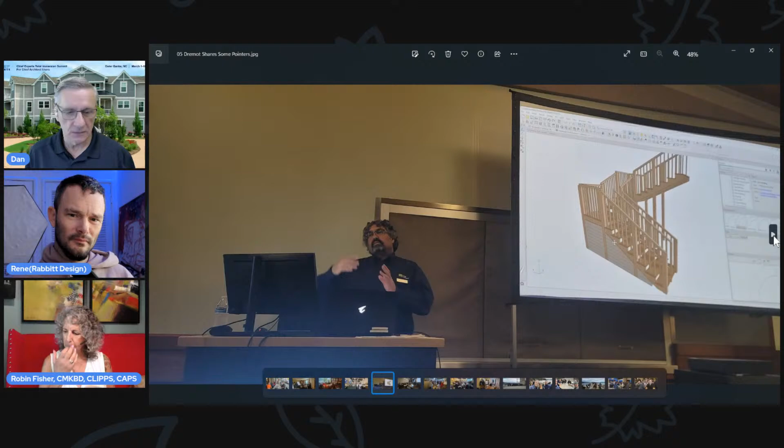Here we are in the day one training with Dermot. Dermot is the head developer there, chief architect, so when we want to have deep discussions with him about what's going on with Chief. That was really nice having Dermot lead that class. I just enjoy him and Brian too, they're both really good, but Dermot, because he knows everything that's going on there, he's the guy.

Here's our class, so it was a full room and a lot of great people there. So a lot of familiar faces that we see there every year, which is really cool.

Here we are after the first day, they always throw a little gathering at Le Peep. It's real close to the Kroc Center, and they put on a nice little spread that you can fill up on pretty easily. This year it was mostly indoors because it was cloudy and rainy outside.

And here we are at the table, everybody's having a good time, there's Ethan and everybody there. So nice little place, I understand it's a breakfast place. I didn't know that, it can't be, no, it's got to be full time, maybe I heard wrong.

Here we are back at the house doing what we do, chatting about Chief Architect.

On the morning of the second day, we always do a hike around Tubbs Hill, or Tubbs Trail. It's a little trail around the lake that's really nice, and I think we all pretty much made that one. It was really fun, lovely every year. And there's Lake Coeur d'Alene.

Jean-Luc, from Canada, our Canadian guy.

Here we are at lunch on the second day. The lunches were great, weren't they? Oh, they were so good. We'll put that on our replies to Chief, they need to do something a little different for their lunches. I wasn't sure if you were being sarcastic. Oh no, total sarcasm, they were not good. My mom always said you had to have one bad thing happen to have the greatest event ever. So that was it, they had two, so there you go.

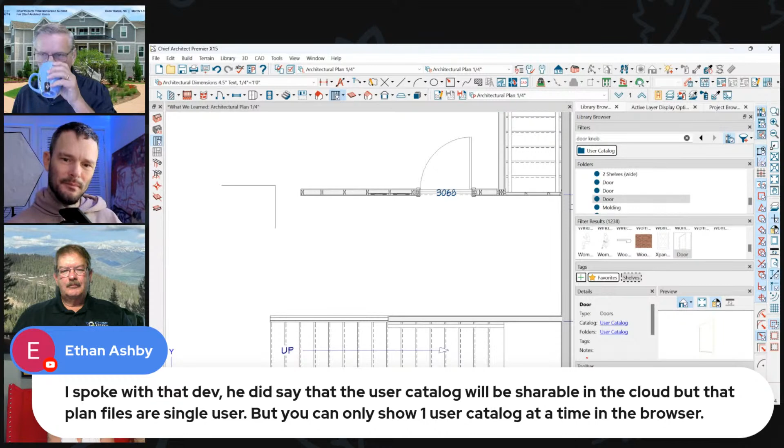Ethan says that the user catalog will be shareable in the cloud. Plan files are still single user, and you can only show one user catalog at a time in the browser. So he must have dug in a little bit more.

Pin one other person's comment up here. Let's see. Okay, someone said that they hope that next year they could be in the advanced 2 class. It was the one right up at the top - it was Voorhees design.

I'll say one thing about this: it's kind of no longer a class when you get into advanced 2. It's kind of like a powwow, more like a brainstorming session. I think it's a really good brainstorming session, and we learn a lot about what they're doing. They learn about what we want and how we're using the software. So from that point of view, it was really nice.

All right, so let me move on to my list. Get out of this screen here because I shouldn't be showing that. Where am I? What are we seeing now? You want to see my screen, don't you? You've got Chief behind that Chrome browser. Thank you, all right, here we go.

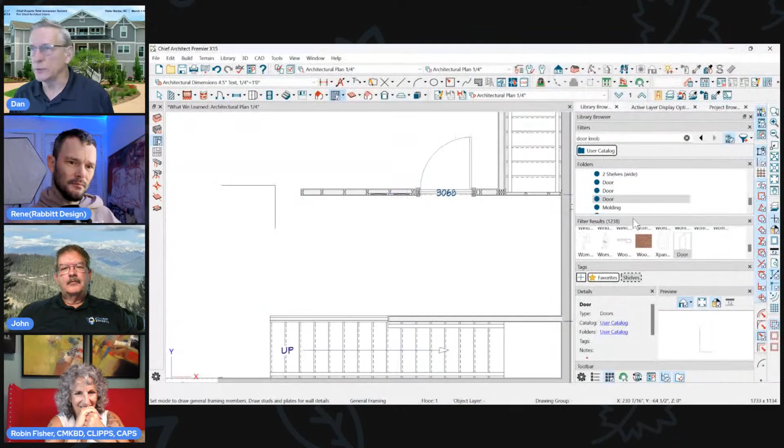And of course, my list. Here's my list. I do a good job of taking notes. Yeah, there were a couple things in here I have to ask you about yet. Let me just run down. I don't know how far I'll get on this list, but I'll go as fast as I can and get through some of these things.

One of the first things that hit me after talking to people there: people want to learn how to do better remodeling plans with Chief Architect. So you will be hearing from us about that, because I was a remodeling contractor for 20 years - that's all I did, and I love doing remodeling plans. They're my most favorite kind of plans to do. I'll do new home plans, but I don't enjoy them like I do remodeling plans. There's just something about remodeling I like, probably because it's my background. I like figuring shit out.

So you'll be hearing more about that. Creating a better designer show. Okay, so that's what we're working on. It just hit me as I'm sitting there - this is a good show. We have a lot of fun with it. We share a lot of great information. We'll do some nice things. And we got to do some better commercials.

And speaking of commercials, let me stop and talk about the new classes coming up, because we do have some new classes coming up. I wanted to see you suddenly holding a toothpaste container and promoting Colgate, or the latest book. Nothing like that. But sometimes it's the last thing I think about - what do we got to mention today?

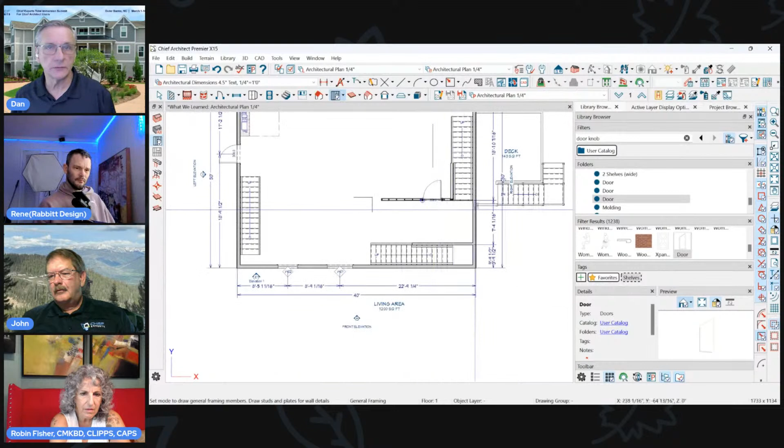Coordinate system in Chief - doing coordinates better. This is not a big deal, but a lot of the things on my list are not a big deal, but cumulative - they kind of add up to lots of cool little things. So you've got your little coordinate dealy bop down here now. I think that's a technical term. That's a good technical term.

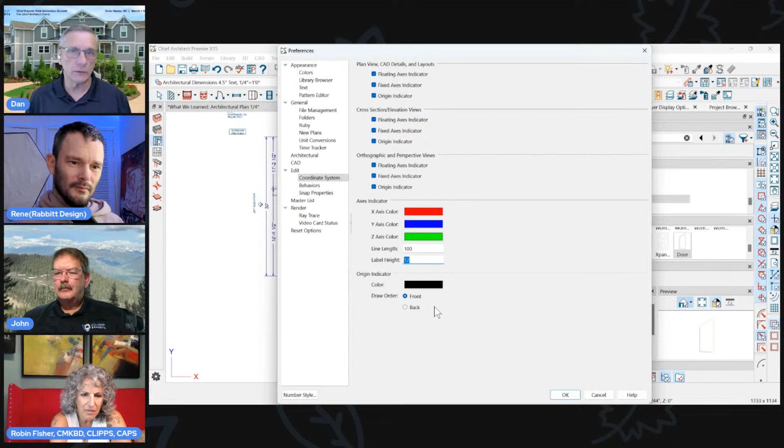Like XY - under preferences, there's some settings. Let me just turn them all on so you can see what it looks like. They have a coordinate system tab here now, and if you turn all these things on, I'll just do it. I would not use them all on, and I'm going to expand this to 100 inches, and we'll leave the labels at 12. So I just did coordinate system, and when you look at this now, I just made this taller - the lines here taller, but now I turned it on so you could see where X and Y is all the time.

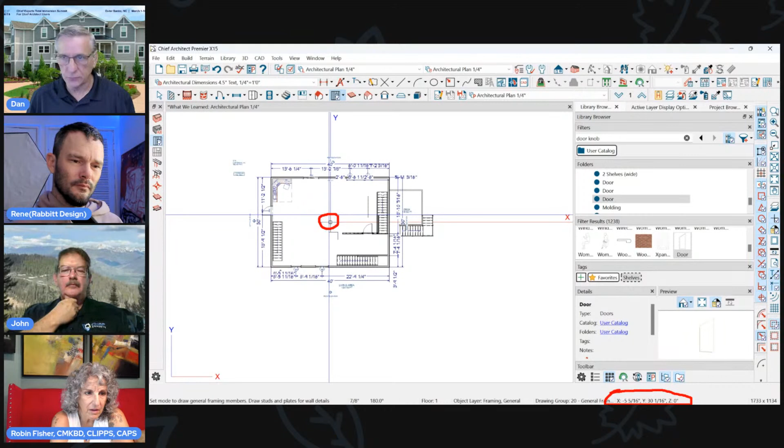Here's one of the other things - that's 0, the 0 coordinate in Chief Architect's coordinate system. When you start a model, you want to start close to that because that keeps the numbers that Chief has to multiply all the time smaller, which makes your plan a little faster. But what's kind of cool is - I asked this in the class - out of the box, that 0 is in the bottom left of the drawing sheet, which I thought's kind of funny.

That's not right - out of the box templates, the 0... right, theirs, not mine. I set mine 0 - yeah, I set mine the same as you, so 0 is in the middle of my model. Here's the 0 in this one.

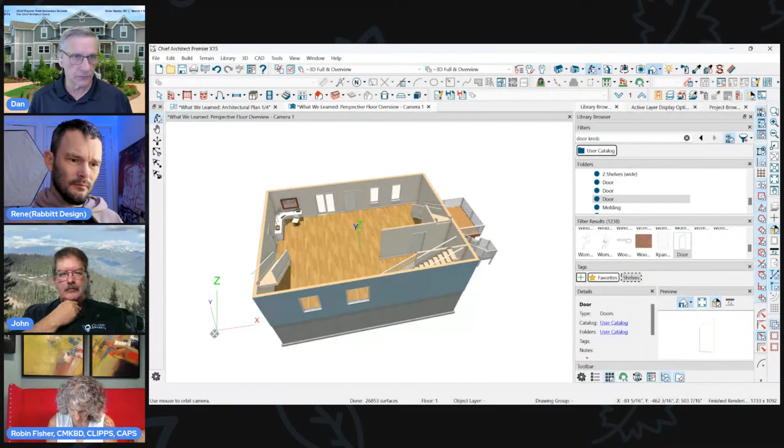But you could set this up so that - I made this a little bigger so you could see it a little better in the 3D views, so you can see which way X and Y is. You can also have it turned on so when you're looking at a view like this, you could know which X and Y is. I like this because Chief's a CAD software - we need to learn X, Y, Z to really function faster in this CAD software.

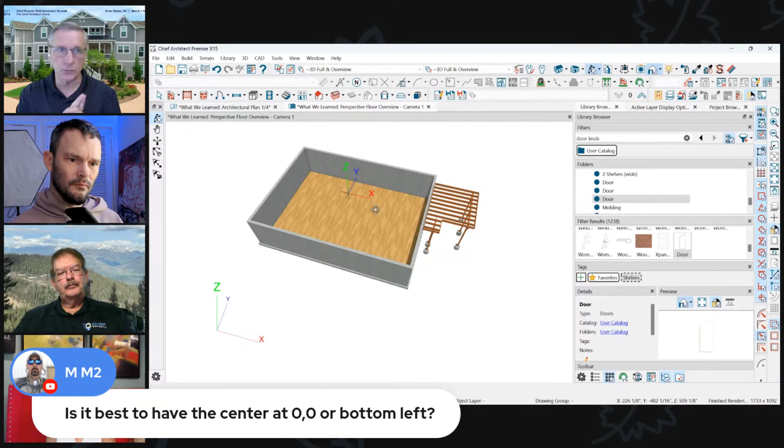This is cool. So run with this for a while and you get used to the X, Y, Z stuff. Then you can turn it off. You can also have that in your elevations, which is pretty cool.

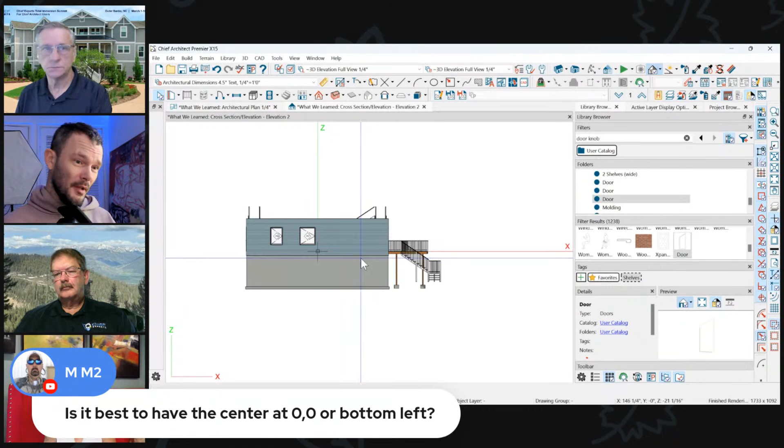So Mike asks, is it better to have the center at 0,0 or bottom left? I prefer it at center. I do too, works with the way I think better. And also, I happen to know that some features work when you're drawing at 0,0 that don't otherwise.

I think it's just a really good rule of thumb to keep your plan centered at 0,0, rather than have the bottom left corner at 0,0. Is it going to make or break anything? Probably not, but it's just a good rule of thumb.

Do you even need to know that it's there? Not really, to draw with Chief. That's one of the cool things about Chief.

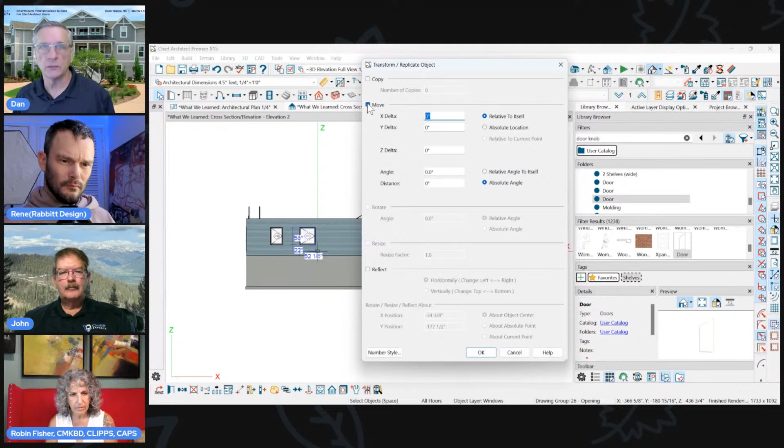But here again, I turned on these coordinates so I can see which way is X. So if I wanted to move that window to the right now in X, just by opening its dialog and say move that window 2 feet to the right, I could do that a lot easier because I know exactly which way X is. And I know that minus X would be this way, so if I wanted to move it back that way, I'd type in minus 2 feet. That's kind of handy when you're just getting used to this kind of stuff. So that's a little thing about the coordinate system.

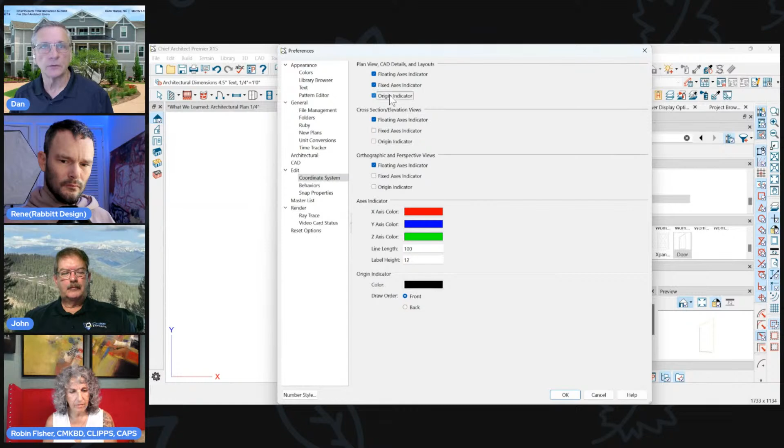I'll just set it back to the way it comes out of the box and go from there. I just wanted to show that. I thought that was interesting, there's a lot of things in preferences. As I'm going through this list, I'm looking at all these things in preferences. Man, they've added a lot of stuff in preferences. Kind of interesting. All right, back to my list.

Dimensioning windows to the inside of frame. To me, this was a big deal because I do a lot of as-builts, and it would be much easier to dimension my as-builts to the inside of frame instead of guessing where the outside of frame is. So what it means is inside of frame. See how I can dimension it here?

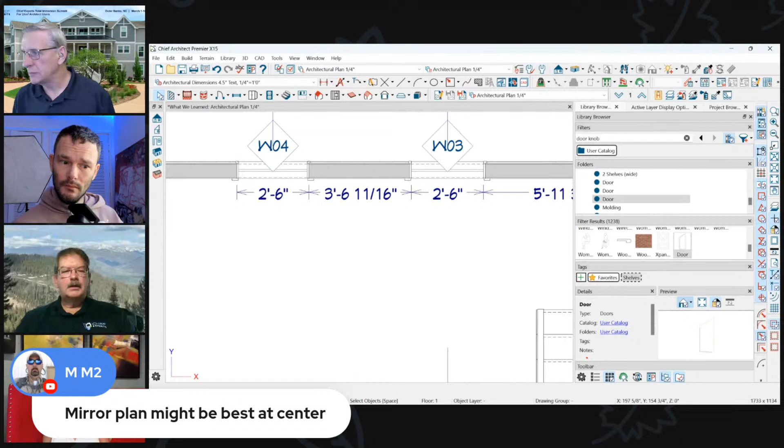Before you go on, let's talk about this a little bit. Here, John, you're breaking up really bad. Is that John? Yes. Yeah, you must have a weak connection, John, sorry, he's breaking up.

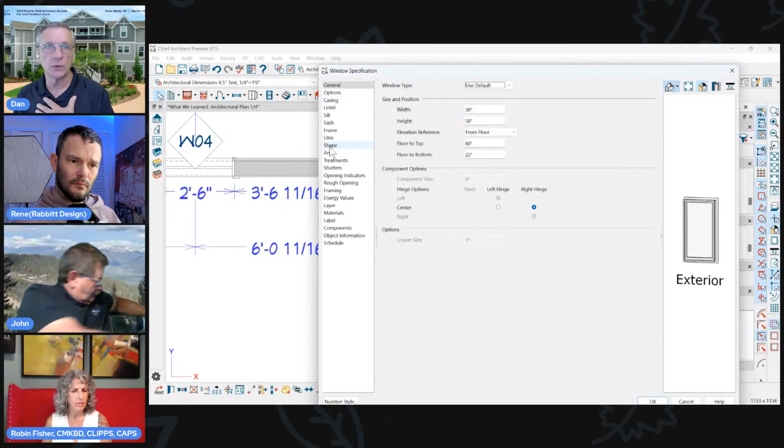And you have to set that in defaults, in your window defaults. It's not in preferences, right? Well, you could do both, okay, you could set up individual windows like I've done here. You do it both in the same place. So if you want to just do some individual windows, go to the frame of the window and set it here, right here. Okay, turn this on.

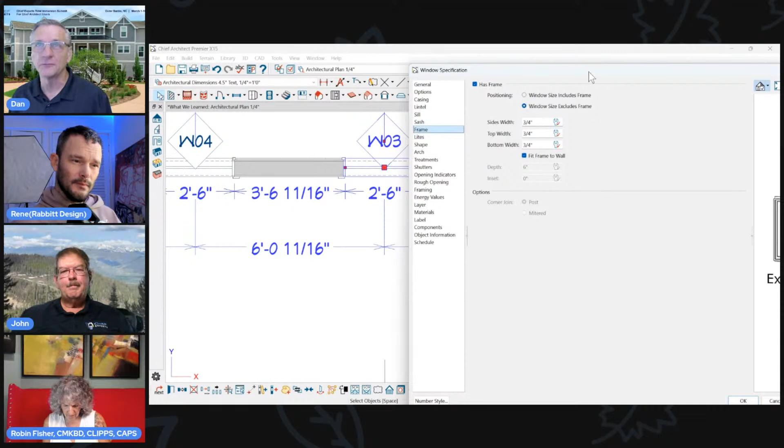Excludes frame. So they couldn't have said window dimensions to the inside of frame or something like that. To me it's like, I want a frame on my window, I don't want to include it. But no, that means dimensioning it to the inside of the frame, not the outside of the frame. That's really good, and it's very helpful for as-builts.

So that's a per window thing. If you want to set it up for all of the windows to do that, double click on the window icon, go to frame, and set it here. Now all of your windows will dimension to the inside of the frame. Okay, now do that while you're measuring the house, turn it off when you're done.

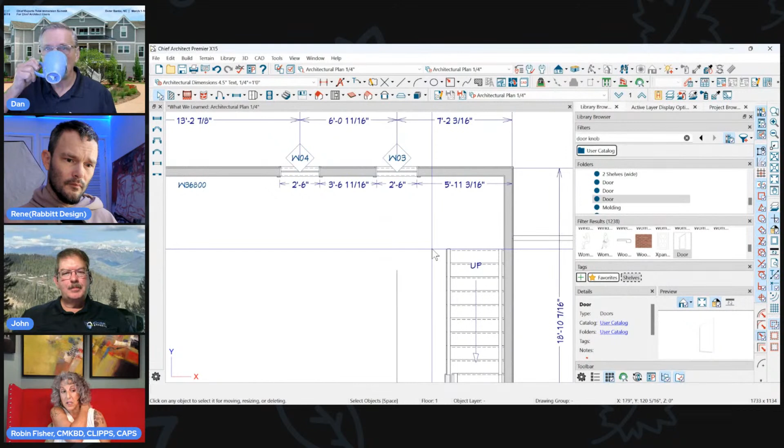See, it makes sense, I don't know, I don't understand why they put it there. It makes more sense that it just was in dimensions, because you have side, center, casings. Why didn't they just have inside a frame in dimensions? That would be kind of nice under openings, then you could turn it on and off when you want it.

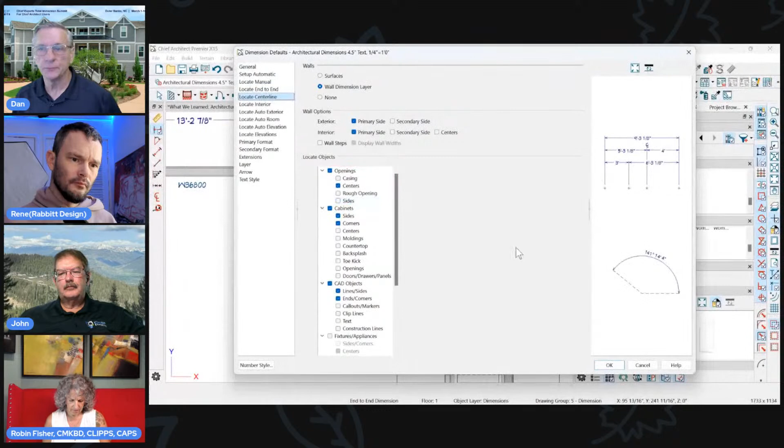Yeah, instead of being global or specific, right? So I'm not sure if we brought that up or not, but it would be nice to have that option just under openings. That's where it should be. Yeah, inside frame, right. So, but at least we can do it now. Yeah, no, it's great, we couldn't do it before.

And let me just, for those of you that might be new to Chief's dimensioning, let me just show something to you real quick.

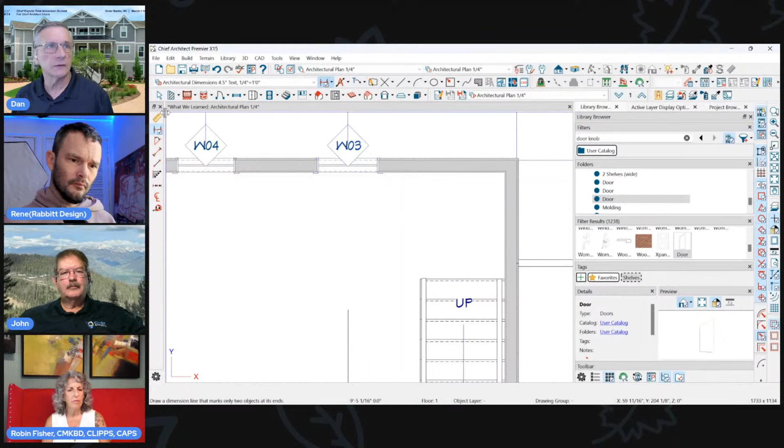So let's say I want to dimension that window. You start by putting your first dimension in - it's going to go to inside of frame, and you're measuring that window. So you move this to where you want it to be, 6 feet. Now I need to get the width in.

You don't have to open the window to type the width in. Just click on the window, click on the point here - see how that highlights now? Because I highlight the window and then click on the edge I want to move. Now I click on this number and say I want that to be 48 inches. See how I can move that over without even opening the dialog for the window. It makes it really easy to do.

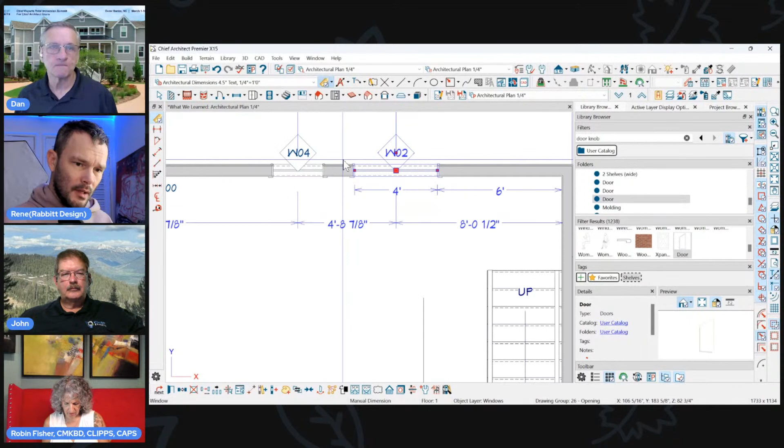It's nice to point out that you can see which edge is selected because Dan has his colors set in preferences. Under colors, I make my handle fills red and my selected edges blue, so it's a nice way to see things. I don't like how Chief sets it up with light gray by default - even the fill style is light gray, so it's really hard to see what you're selecting. I'm not a big fan of that.

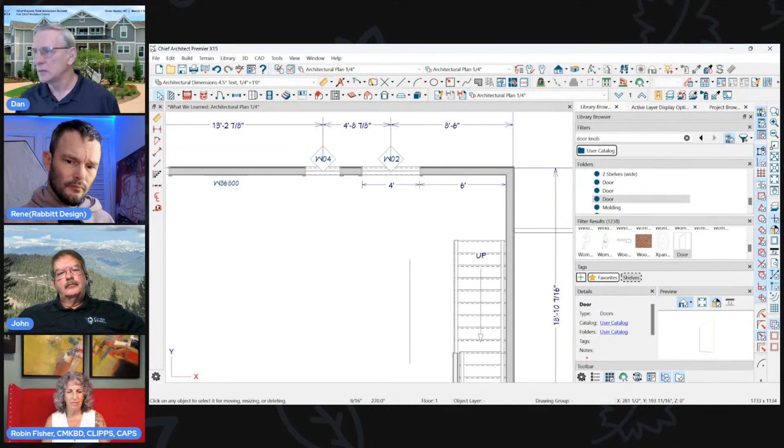How are we doing? Oh, we've still got a half hour here. Cool, design and client information.

Aaron's asking: dims to frames could be changed just for certain views via annotations, right? I don't believe that's correct - that's held in the settings of the window itself, which has directly to do with the windows, not annotations.

Hey John, how you doing? Where are you? I'm doing good, can you hear me better now? Yes. I just put on my headset - I was having so much fun teaching I forgot we had to be in the show today. Well that's a good excuse, we'll let that one go. Kevin has a client coming in that wants to do a 1.5 million dollar house, so he had to meet with them - we'll let that one go too, we get it, take care of your business.

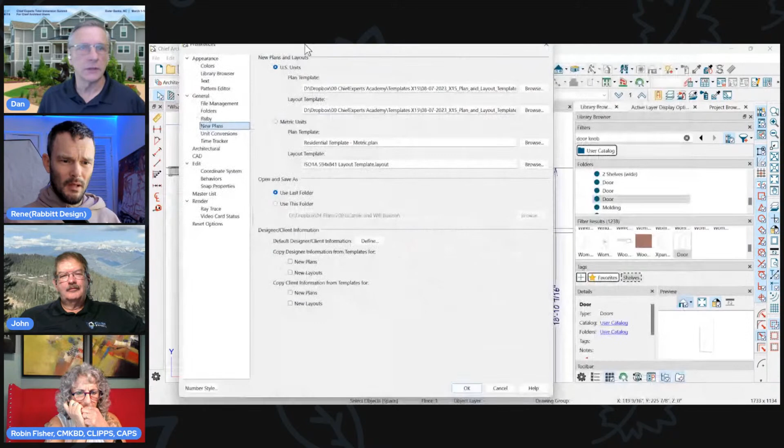All right, designer and client info - I was playing with this one a little bit in Chief. You'll notice in the preferences, under... where did that go again... it was under new plans. Here it is - this is new in X15, this designer client info, and you can define it.

So if you define it here under preferences, every time you open a new plan, whatever you put here is going to be in that new plan. So if I go to define and fill in my designer and contractor information, that's fine because you want that in every one of your plans, unless you do it differently. But for client information, I was just typing that in there.

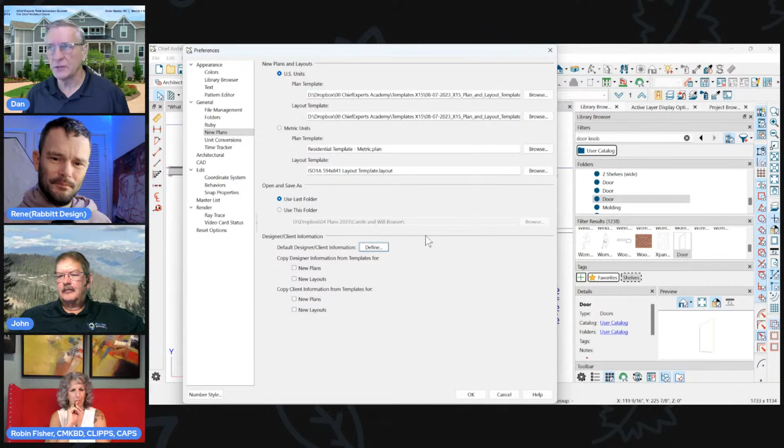You don't necessarily want that in your preferences. So it's like, well why did they put that there? I'm not sure, that was a strange one to me - it's kind of silly to put it there, unless you draw for the same person every time. But what you could do is put it in your template, go to save, and define it there - copy designer information, copy - exactly.

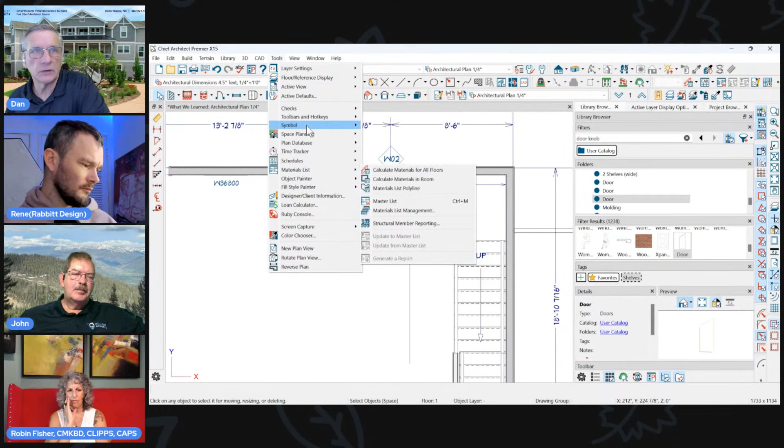So you could play with this and see how that works for you. What I've done in my template is I've gone to tools, designer client information, and put my information there. This will auto-populate on my layout pages, and then when I'm on my layout pages, I'll do the client information and that'll auto-populate my client info on my pages. And if I were to change page sizes, it would auto-populate that stuff automatically too.

Do you have to use this? No, but it can be handy.

It's so nice. We did spend some time talking with them about giving us some more custom fields that we could put in here and let us rearrange them, so we'll see what they come up with.

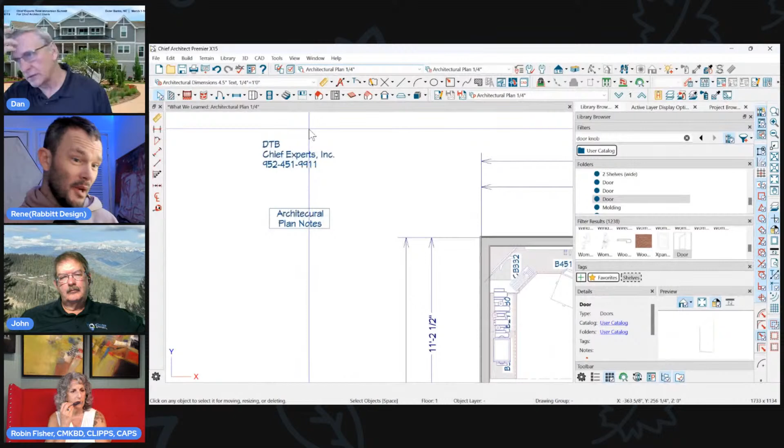Did they push back on that? What did they say? Because that is something we need to do. They said it might be easy, and then they said we don't like it when we say it might be easy. Well, I can understand that.

So when you use those fields, you're using macros. Here I've typed some text and I've used three macros: my designer name, company name, phone number. So you could have a block anywhere in your plan or on your layout that would automatically populate using that tool's client or designer client information.

The way you add a macro is you just click the macro button in the text box, contact info. There's the client, designer stuff, and here's everything on that list. So if I wanted to have my street address show up there, I click OK.

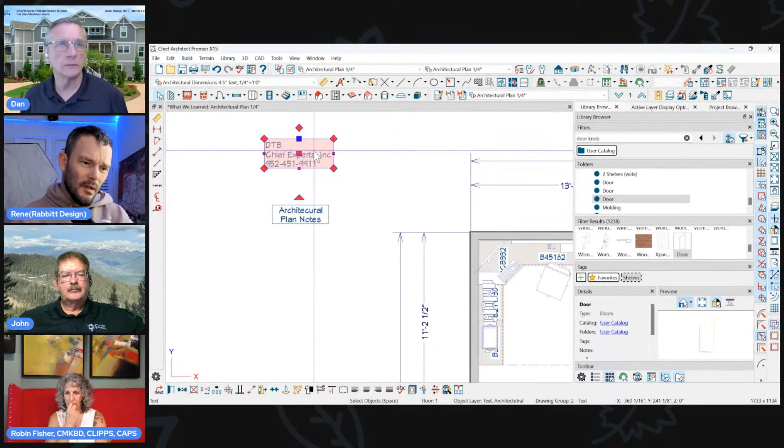I want to address this comment from Mike. He says, I have my logo on the layout, so I don't use this feature, which is the designer information. This is a way to store macro values and call them up very easily. So if you've never written a macro before, this is a really rudimentary and simple way to get a text macro that you could use everywhere.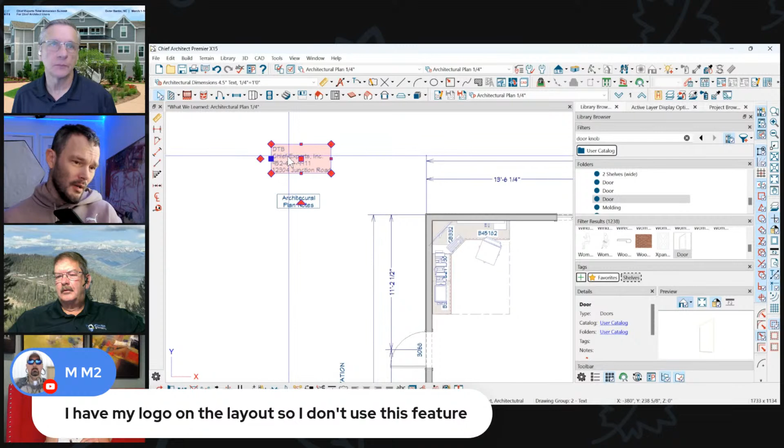It doesn't matter that it says it's the designer name. You could use designer name on your plans for APN or any number of information that you always want to store for every plan and draw up. So just something to keep in mind, that's a really simple implementation.

Renee's heavy into macros, so he's got some pretty complicated macros that he's developed to do different things for his project. But in this sense, it's very simple, so even guys like me can figure this one out.

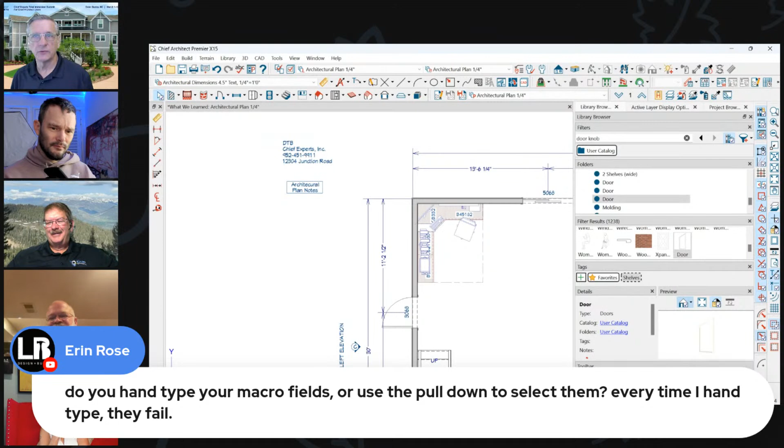Hey, Kevin. Oh, look, Kevin showed up. Hey, Kevin. How is everybody? What did I miss? Everything. Everything. There's a test, Kevin. There's a test at the end.

Kevin, you want to answer this question here? Yes. Which one are we on? No, you don't. No, you don't.

Do you hand type the macro fields or use the pull down to select them? Every time I hand type, they fail. You just have to make sure that you're typing in the syntax correctly, or they will not fire. So when we're calling a macro, our values need to be between percentage signs, and that macro needs to be in proper sentence case and everything.

For the ones Dan was talking about, for filling in the fields and stuff, you just select them from the pull down, those are already in the system. It's amazing how many are already in the system. There's a mean bunch.

And then you call people like Renee to get special ones. Yeah, if you're really stuck on that stuff, definitely call Renee. He can help you out on that.

The one nice thing about populating the preferences with your company information, it shows up on the plan and the layout when you open a new layout, unless you had it programmed in to start with, which is what I do.

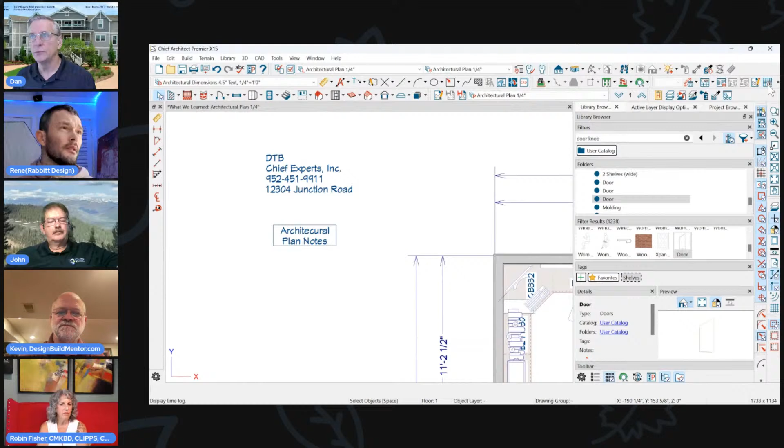The other thing about names, real quickly, let me mention this under Time Tracker. So when you're in preferences, go to Time Tracker, make sure you put your name there, so that if you have different people working on plans, when you do a sheet that tracks your time on the project, you can sort it by the user and see how much time each person has spent on the plan.

It's a smart idea. And you can select more than one line there now, and it will give you a subtotal. That's really nice. So I can go like this and hold my control key down and select individual lines, or hold the shift key down and select the whole group.

So it tells you how much time you got selected there, and then you can add notes to that selection and click OK. See, it added a note to all of those. Never done that before. Cool, all right, back to the list.

Facebook user, any chance we can do this real quickly? If you could expand on that, I'd love to know what. Which one we're talking about? Can you explain how the macros in a dropdown are much less than if you link an object properties macro query?

I think, Renee, you could do a whole class on that. Yeah, easily. I think we should just do a show just on macros, because there's so much to cover.

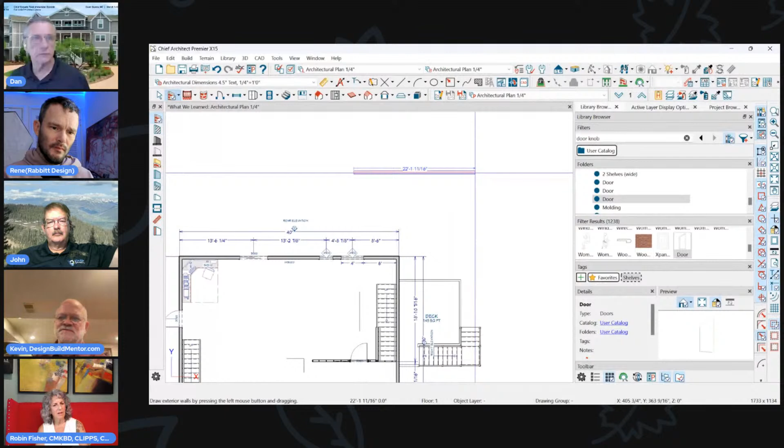My screen doesn't freeze, so let me zoom in and do it. When you draw a wall, notice that arrow. On the left side, it's got no arrow. On the right side, it's got an arrow. That's telling me the start and end of this wall.

So if you go to your preferences, edit, and turn on show start end indicators, as you get more into Chief, this is a big deal. When I click on the wall, it says S and E. If you have a CAD line, it says S and E too. That's your start and end.

You're frozen right now. I am? Uh-huh, can't be. You are. Cut them off, come on man. Is it working now? Am I zooming in and out? Nope, let me get out of it and come back into it.

Trying to remember if I have mine start end on there. I don't, I need to set that up. All right, where'd it go here? Get back here, all right. Looks like you're back now, probably. Am I back?

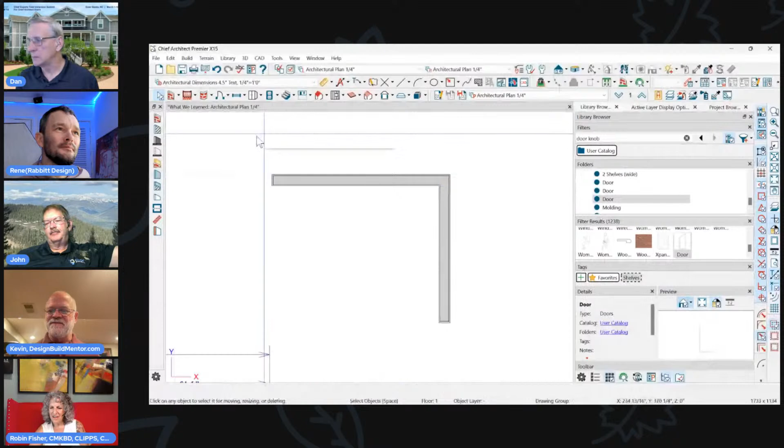Am I back? We're seeing you go through your screen. You're not showing Chief, you're on the other screen. I should be showing Chief now. You're not. Oh come on, freaking technology. This happened to me yesterday. We were doing something and did a speed check on both our computers, and then it came back to full speed again. It's like they were watching us.

Yeah, they know you might complain about the internet speed, so they turn it up real quick. Exactly, they must have some kind of algorithm that checks that or something. I don't know, but it was pretty funny.

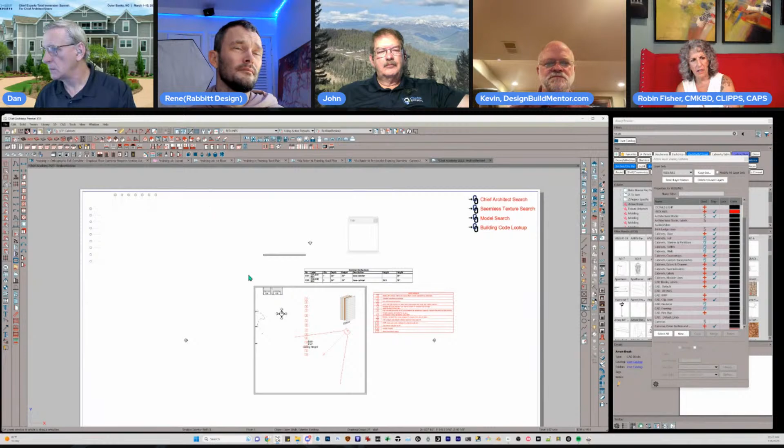So I'll go over to Tools, down to Designer Client Information. That brings up the client information panel. If you can see on the left-hand side, all of these are simple macros. For instance, I know I'm not going to use the fax number for anything, so I might put 'N/A' in the fax number field. Press OK.

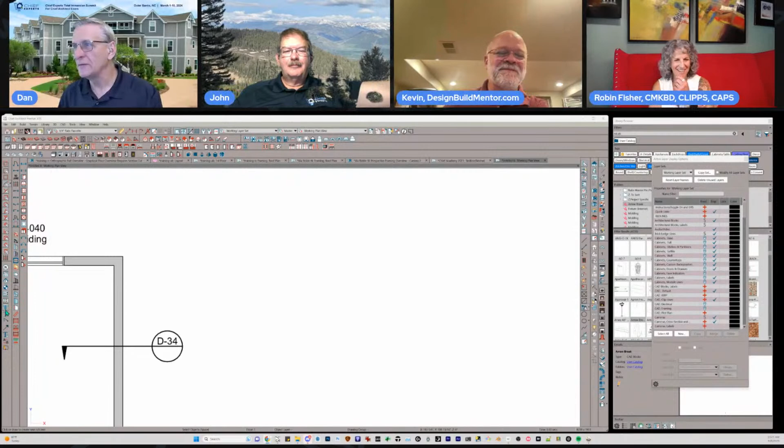And then anywhere you would like— oh sorry, I think I pushed a button. I pushed a button and got rid of Renee. Sorry, Renee. Now we're fighting each other on the buttons.

There he is. You can just pull this into, say, a text box, or it could be in a note or anything that takes macro input. So we hit the drop-down menu on macro, then global, and under global we have contact info, client, and there's that fax. So now I am calling up that fax macro.

Your screen froze, Renee. It's removing me—I'm pushing stupid buttons I shouldn't be pushing. Do that again, Dan. I didn't do that one. While you two are thumb wrestling over your screen, John keeps shutting my screen off. It wasn't me. I didn't do it.

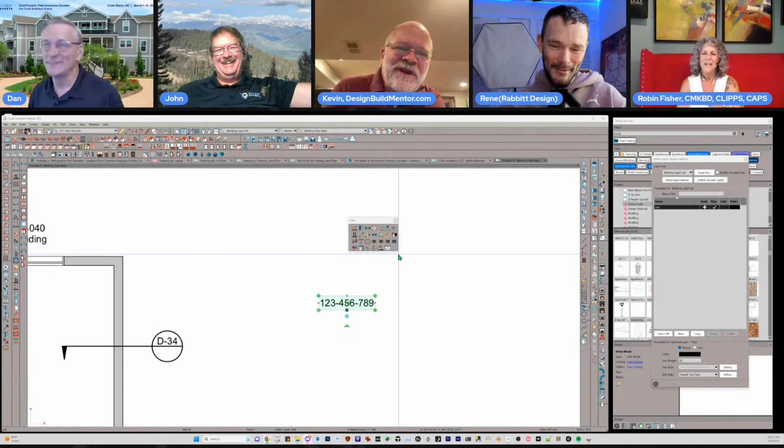In the discussions, there was a lot of agreement that having multiple fields in there besides designer and client would be really desirable. They took a lot of notice of that—I think they actually took a vote, and every single person in the room said yes. So it's a very easy thing for them to add. Hopefully we'll see it in the next version. But it's not something they presented to us, it's more that we requested it.

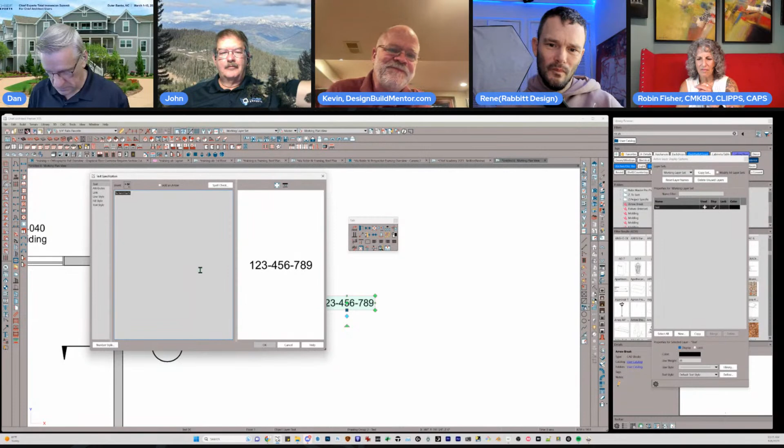Let's see, we got this one: any ideas on how to copy client info from layout to plan files so I don't have to? Well, you could always send it, but now this system works across layout and plan, so you don't need to copy it—you can just call it up in layout as well. I believe that's the new trick.

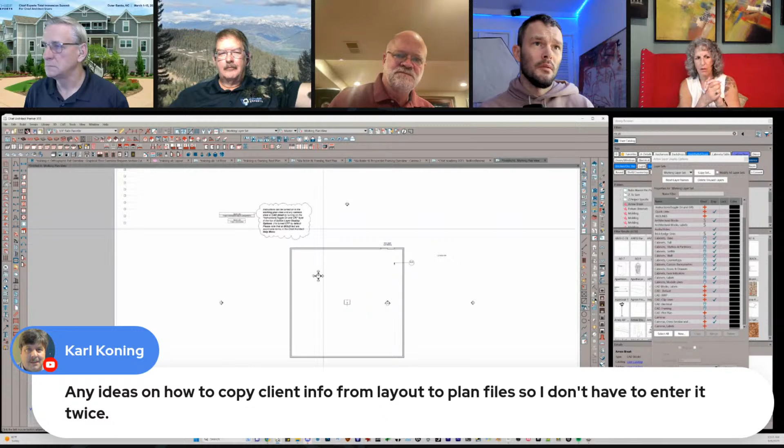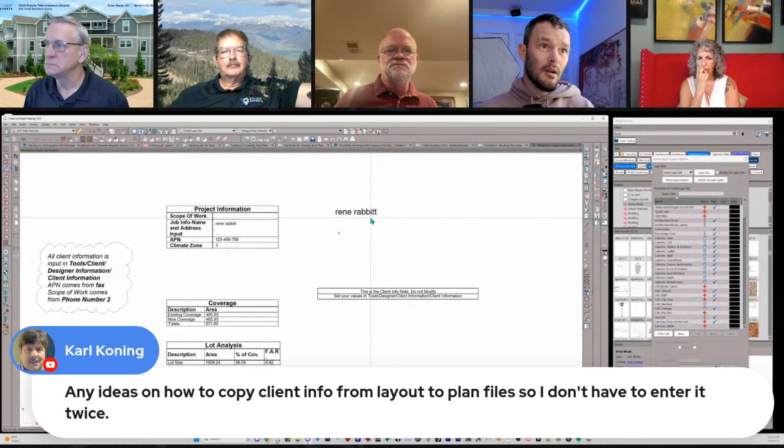Once you have the new plan and layout linked, can you do that? If the plans are linked—so you create your plan and your layout right away, put the client information in there, and link these two together—once they're linked, you should be able to pull the same information into both. My default plans have a link to a CAD detail that has all my client information, so when I fill this out it's automatically there. This box populates with the address and always sends to my layout, so as soon as I start a plan, that's already sending to layout. So there's something to consider.

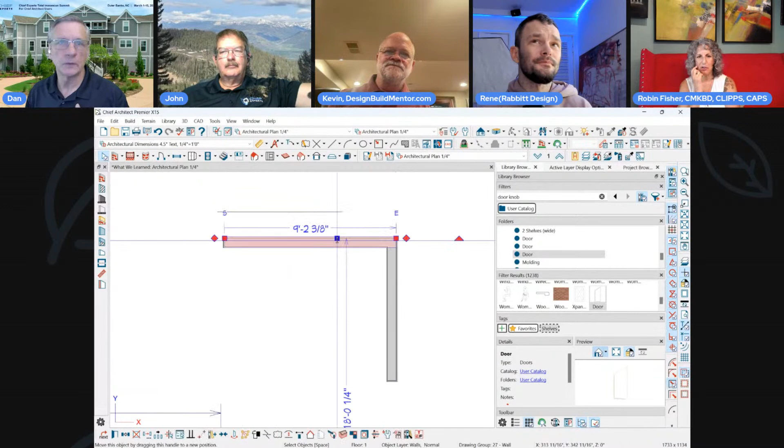Cool, all right, let me present again, see if I can get this to work. My Discord link is at the bottom of the screen on my website—look for the little icon that looks like a game controller with a face, that's Discord's icon. Not a Kevin bot, huh? All right, so there's your start/end indicators. Are you guys seeing my screen? Can you hear me? Yes, we are.

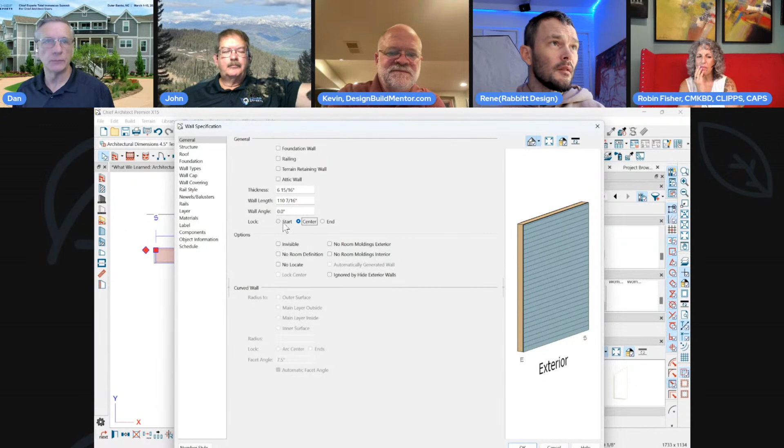All right, good. So start/end indicators come into play when you use resized lines and things like in walls—you want to lock where it resizes from. So I want to resize that wall by locking start, and then I can type in a different wall length. So that's what that is. There are also settings for the wall, how it builds into another wall, whether you want it to build through the adjoining wall or stop at the wall.

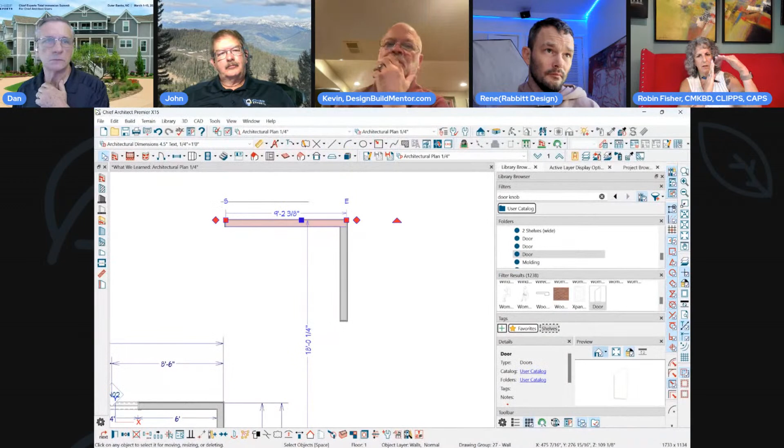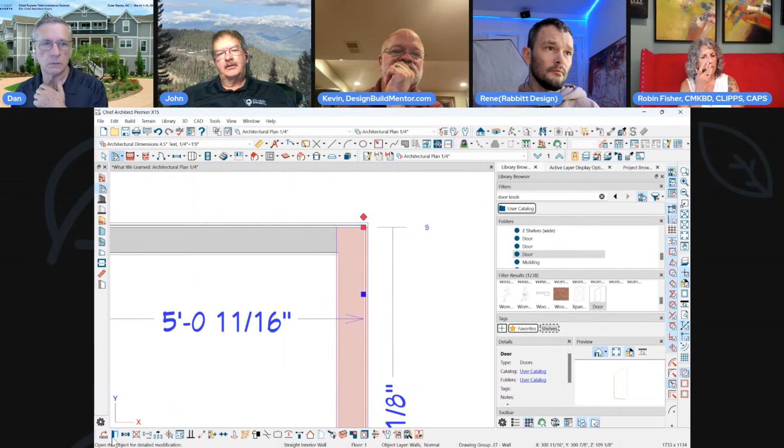Oh my gosh, where is that? Can you show that? Where the walls join, where they go through or they stop—because that's an issue, especially when you want to make sure an end is finished, when you bring those two corners together, these outside corners. You can tell it for the end to build through the other wall, or stop at the other wall. It's in the wall dialog—open the wall dialog. I do have Chief up.

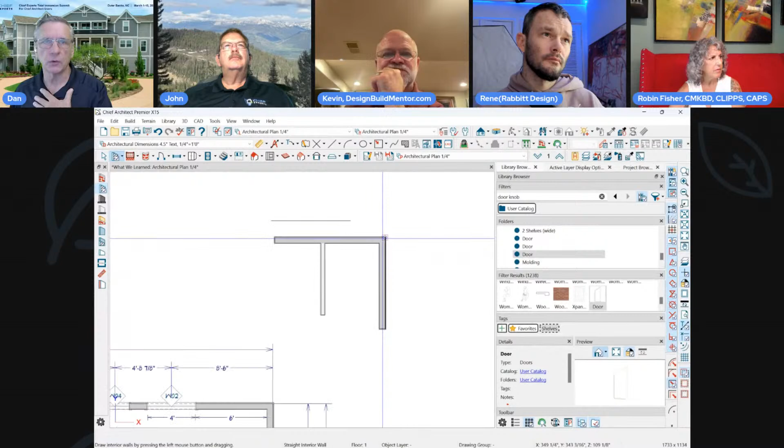Let's keep moving on here. Store schedules in CAD detail windows - that's one of the things they mentioned. Anything you put on your floor plan, schedules, notes, CAD details and all that stuff, it's going to slow your plan down, because if it's open Chief has to deal with it. But if you put all that stuff in CAD detail windows - your schedules, CAD details, photos, all that kind of stuff - you're not using resources when those things are closed. So if you got a big plan with a ton of stuff all over it, put it in the CAD detail window and you should have better results. That was one thing they mentioned, and I thought that made sense. That was a good one.

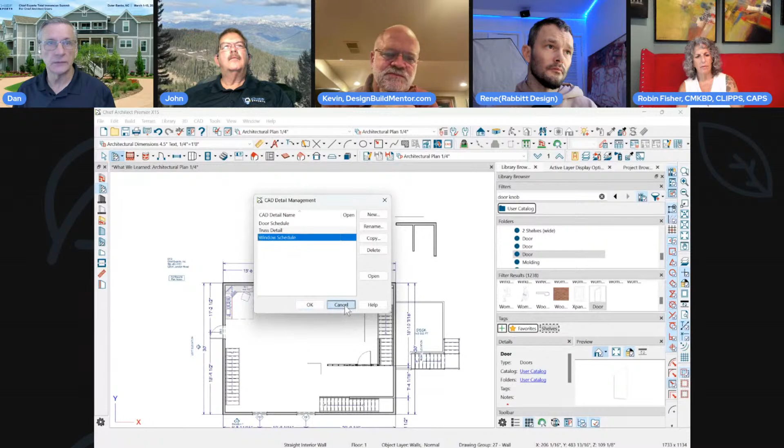Actually, I think you taught me how to do that, Dan. Did I? I created all my schedules and they're all in separate CAD details in my template.

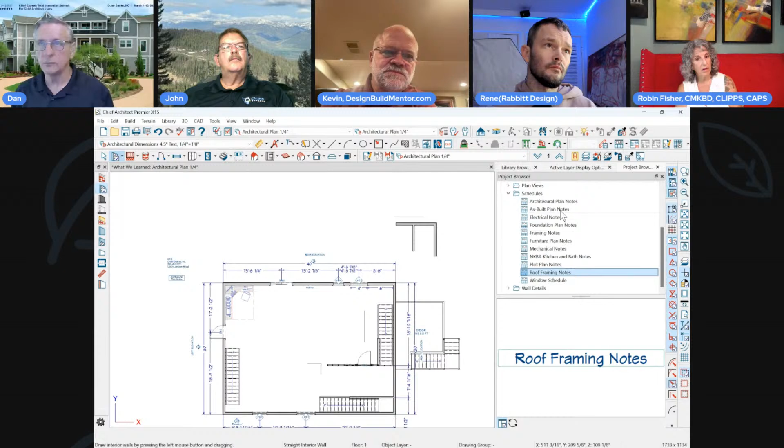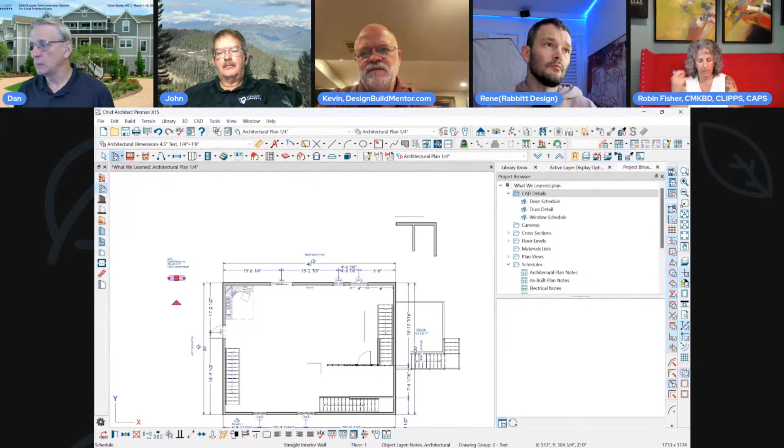The nice thing is when you use your project browser and go to CAD details, here's your different schedules you could have. I don't know if I can rearrange those or not, but you'd also have it under here too, so it's going to add to the list. I have some note schedules on the plan, that's why this list is populated. But if you have different schedules, they would be on this list as well, so you'll have both. And when you send things to layout, that's going to be a lot easier. So Dan, in my plan I have saved all my schedules under CAD details, and it also shows up under schedules - right, it automatically shows up. As soon as you put it in your plan, it'll be on both - it'll be on the schedules list, and also wherever you name your CAD detail window.

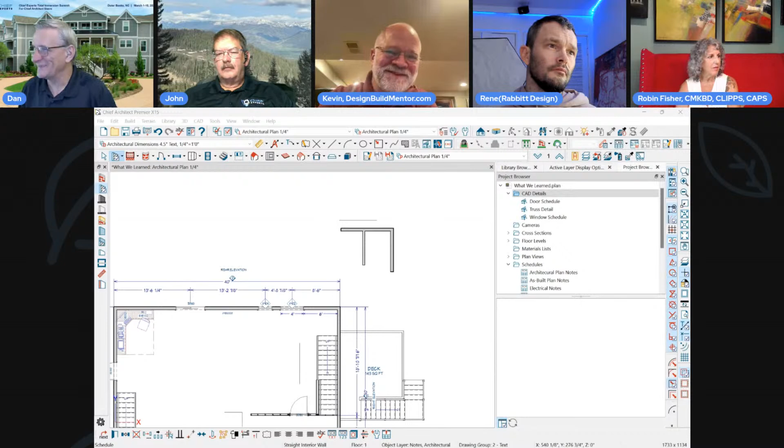Well, Michael Pock, look at you! I haven't seen you in a long time, how you doing buddy, Michael? Kevin, you know Michael, he was at our first event. Yes, hi Michael, yeah, cool, nice to see you guys, last time I saw you.

Back to Chief, where was my list? Okay, keep moving through. Sorry, scrolling - you're really sorry, aren't you - scrolling in and out of windows.

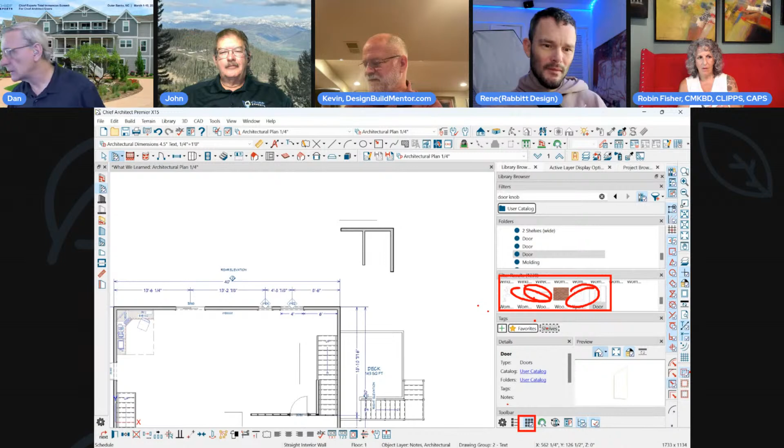What that means is when you're in your library browser and you click on this little icon down here, you can see items like this and they show up like that. Come on, why is it not going away? My zoom tool is messing up, I'm on a roll today, I gotta exit my zoom tool. Anyway, when you click on this spot and hold your control key down, you can zoom in and out of these details and make them bigger and smaller.

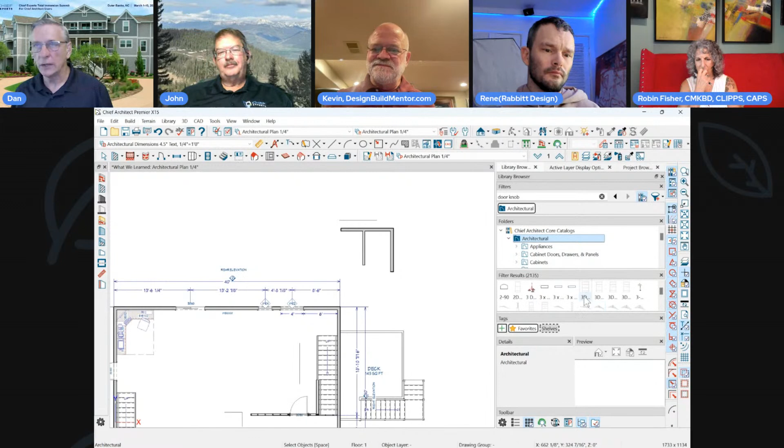God, my computer's going nutty. So if I go to a library that has a lot of stuff in it, I can roll back and kind of see more things. My library is usually open on a different window anyway so I have a bigger window here to see, but you can hold your control key down to scroll in and out of that. Another use of that control key - when you hold it down while zooming in and out on the floor plan, you zoom in and out really fast.

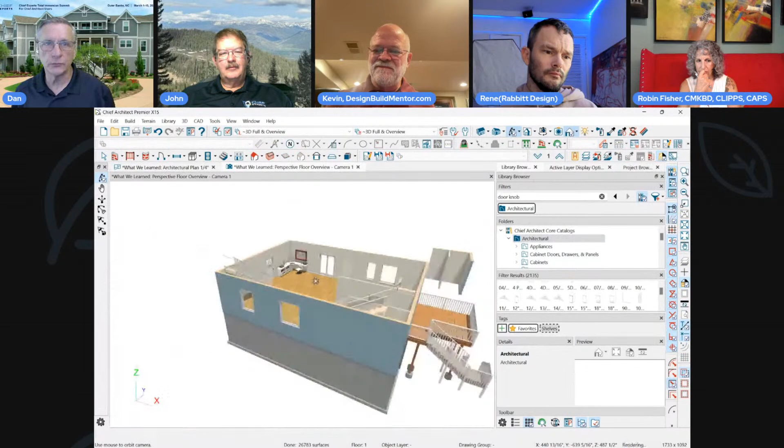When you bring up a 3D view and roll your mouse, if you hold the control key down, you roll slower. That control key does a lot of things when you're rolling in and out with your mouse. Chief has done that, and that's pretty cool. But I never thought to use it in the library browser.

And I do love the new library browser. It's really cool, better searches in library. This is a Rene specialty, he knows all about these kinds of things - the Boolean keywords, not, and, or. You can also use exclamation, plus, and the line symbol. This is directly from Chief's help menu. The line does the same thing as not or. Yeah, these three symbols do the same thing as these words, at least that's what I figured out.

So when you're looking for something like a toilet - not round, toilet not round. Plus, toilet not Kohler, toilet plus, you want just Kohler. So you put plus Kohler, and that'll give you all the Kohler toilets in the library. If you want to exclude something, you use exclamation, or type the word NOT in capital letters with no spaces. Now I got no Kohler toilets.

Could you do it, but the tag has to be there if it's round bowl? Could you do three controls? Can you say not Kohler plus round?

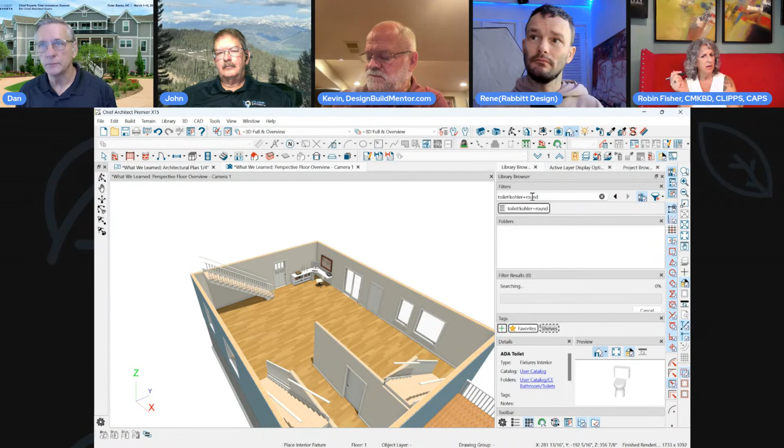Good question. Well, there you go - yeah, you got round bowl toilets, and they're not Kohler. Oh, how about that? Look at that, so that's really nice.

And I know, Rene, you've had a lot of input with Chief about getting this kind of functionality in the library, and it works really nice. Yeah, we sincerely appreciate that. Good job, keep on those guys.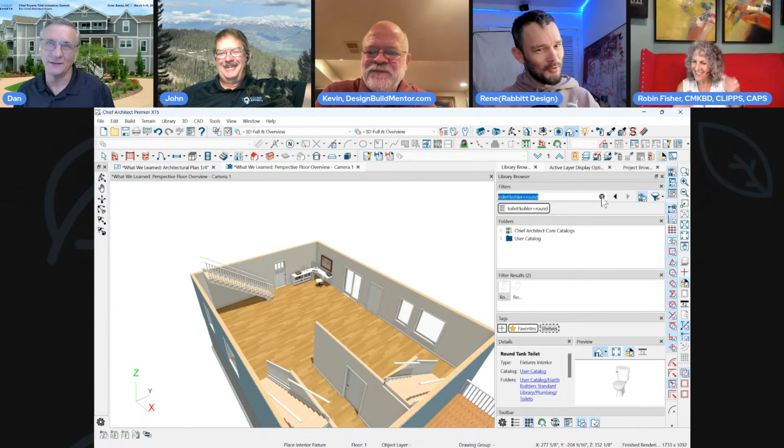And I know they sent you a big check for all your advice. Yeah, don't you start with me. Yeah, just like the big check. I'm with you always, Mike. About the toilets, yep. I just have a client right now who actually specified that she wanted round bowl toilets. That is the weirdest thing, but whatever. She's also a female - males tend to not like round bowl toilets. As a woman, I prefer an elongated bowl. So, all right, just putting it out there.

The next thing - sitting next to Rene at the event, I got to watch him use his tags. I've not been using tags at all, I need to get into those. So what that means is whenever you see something in a library and you like it and want to use it over and over again, you can tag it. So if this is the dishwasher you use all the time, you could make a tag.

So you could manage tags. You could call it a favorite, so that would come up all the time. Or you could create a tag and call it your dishwasher. And you don't have to save it to your user library first to tag it.

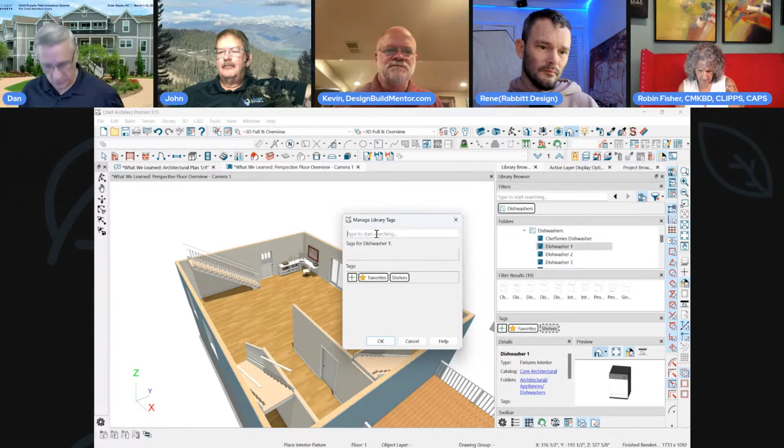Okay, so where'd my tag go? Let me do that again. DW, and did I tag it for dishwasher? What did I do wrong here? Tags, manage tags - how come I didn't get it?

Oh, I got to hit the plus sign. Then you can add a tag. So you can create a whole list of tags. Rene, you have about 20, 30 tags in your list. Can I show my tags? Let me just finish this, and then you can show yours real quick.

So anytime I want that dishwasher now, all I have to do is go find that tag - you got to click the gear icon down here. Click the gear icon and open up your tags, make sure that's turned on. So then if I have 10 different dishwashers, I just hit the dishwasher tag and they're all there. If I want these shelves, that would show all my shelves. I must have not saved it.

You got to be careful that you don't have them all on up here. So I have a couple shelves I saved. So it becomes your new way to search for things with tags.

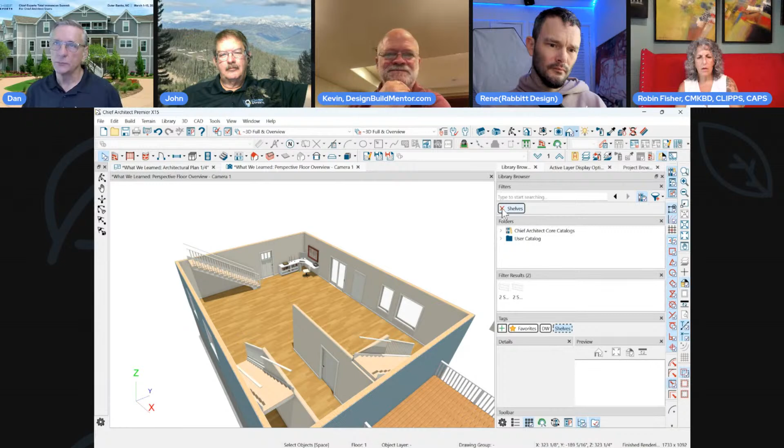Go ahead, Rene, show what you got there. I use what I'm calling stacked tags. I'm using kind of generic tags here. An easy one for me to show is if I hit wall, exterior, and material, that's going to get me very quickly... this is going to get me specifically any kind of exterior material finishes. Now, if I take off exterior material and I leave wall in place, and instead I go to something like light...

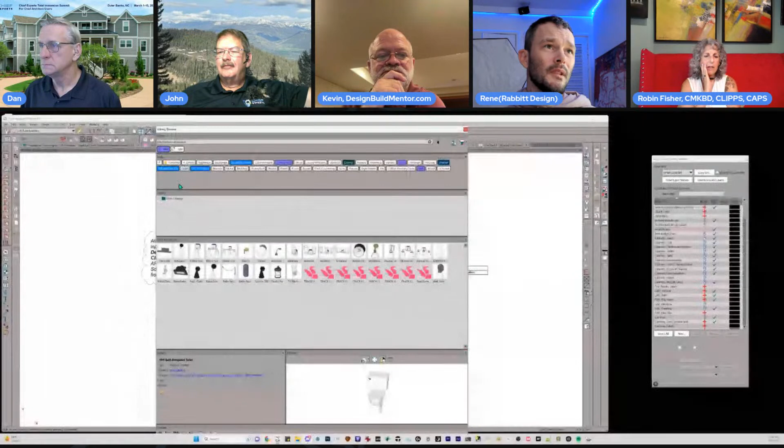What's with all the rabbit heads? Who kicked Rene off? Not me. Bye, Rene. We got internet ghosts bugging us today. I think it's because of the writer's strike. Could be. Okay, that works. Let's see what other conspiracy theories we could come up with here.

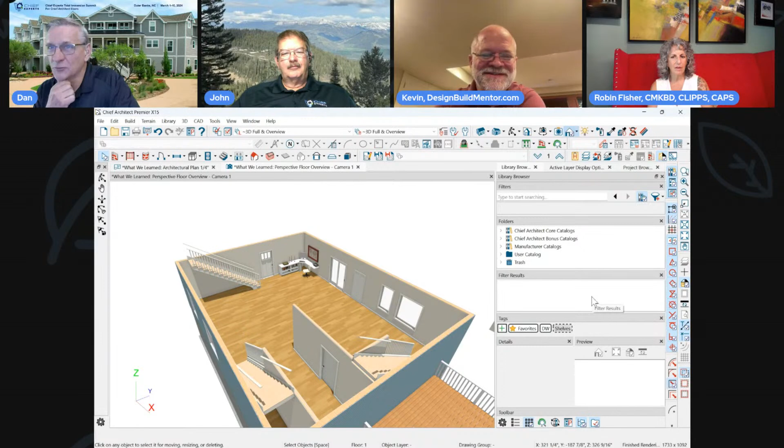Yes, yes. Now again, back to tags. Start using tags. I didn't really know how they work, but after watching Rene, I'm going, oh cool, I can do that. Both John and I have this conversation all the time about how horrible we are at saving things to our libraries so we can use them over and over again.

Hi, Rene. I might be able to figure out tags. Hi, Rene. You know, we didn't do that. I swear, it was the ghost.

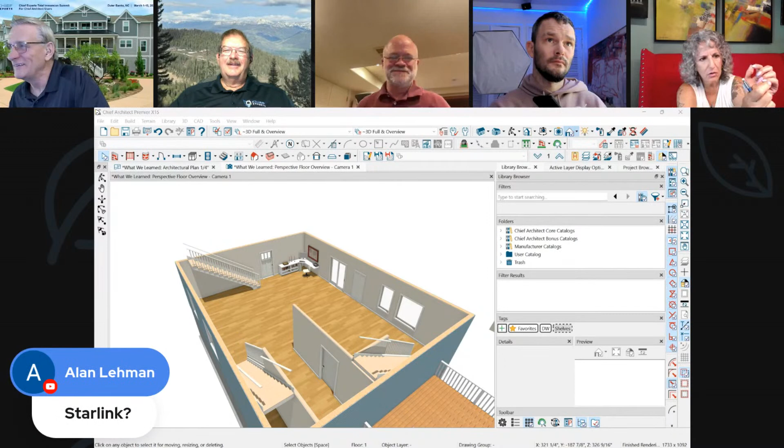Ethan sent me a set of plans so I could review them, as a PDF, and on the first page he had a URL click to the 3D viewer, which was pretty cool. Yeah, it was very cool. I really like that, so thank you, Ethan.

Okay, back to, we're going to cover a few more things. And Rene, I was just here, I'll answer this question. I have all my tags as dot tag. That's because you can quickly type in your browser dot, whatever your tag is, and hit enter, and it's going to enable that tag. Otherwise, if you're using generic tag term names, that might be in other searches, that doesn't work.

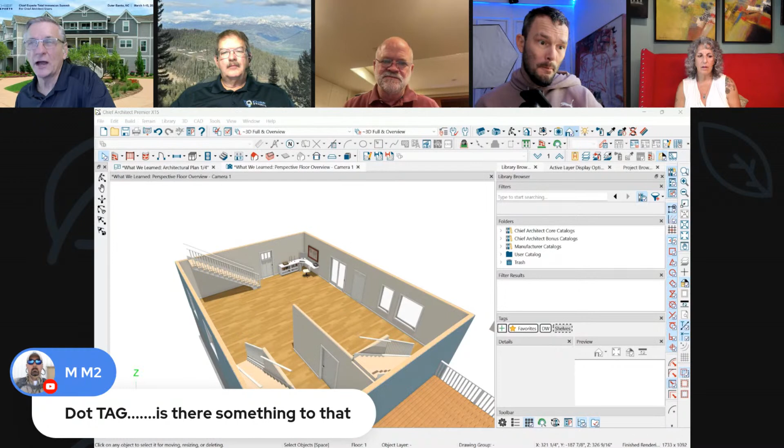So you put a period, you don't put the word dot, you put a period before the word, period tag, right? So you could just type that out, hit enter, and it's going to enable that tag real quick. Cool, got it, like it.

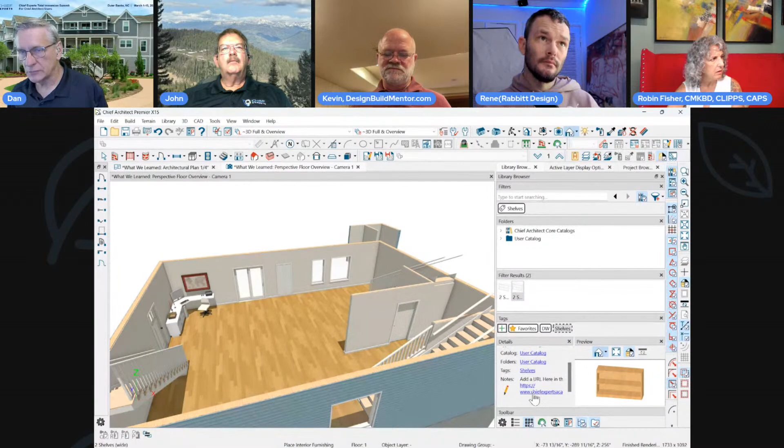Okay, oh my god. So if you have an item in your user library and you want to always have access to go to the website for that item, just click on it and bam, you're right there. You sign up for classes.

So that's kind of cool.

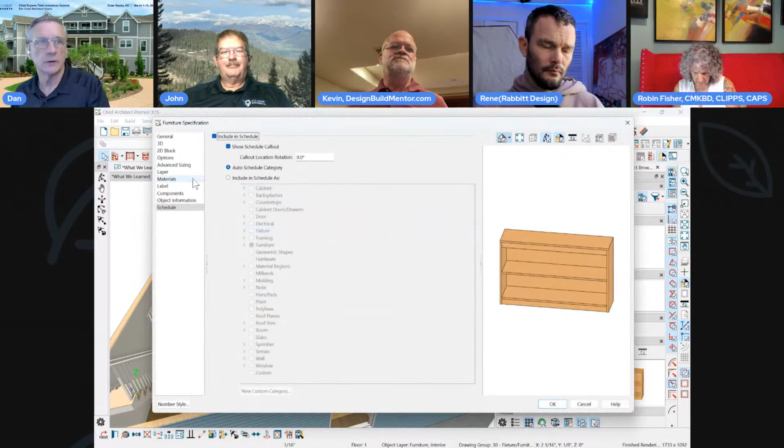The other thing we'll talk about next time is using a URL on your schedule. So if I put this in my plan, under components, under object information, let's say I put a URL under comment. When I print that schedule, that will be a clickable link.

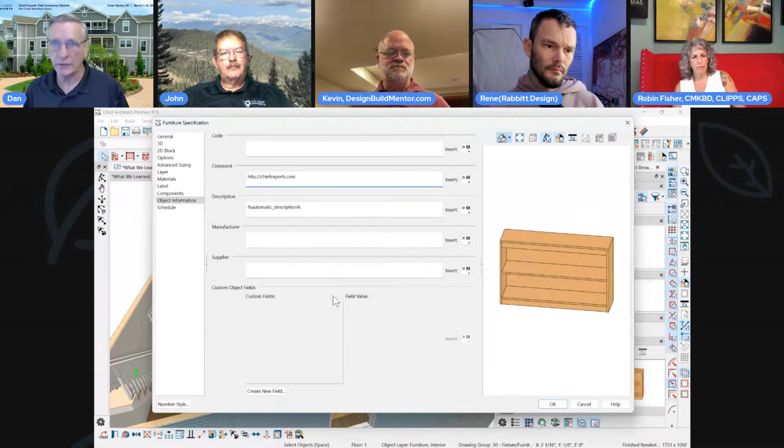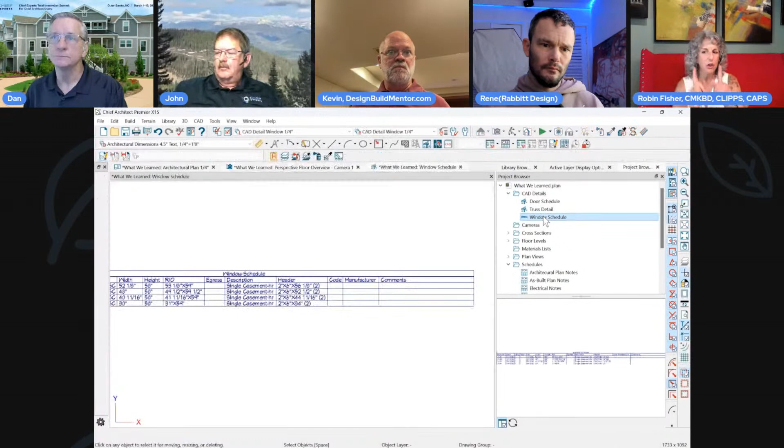I would say be careful of that, because sometimes if you haven't confirmed things like with the kitchen and bath designer, and a client happens to change an appliance and you're not aware of it, you're sending specs for an appliance they're not using. You have to be careful - if the client said this is what you're using and they make a change and you don't catch it, that can be a problem later, and you're going to be responsible. I don't want to buy somebody's refrigerator panel, so be really aware of that if you do it.

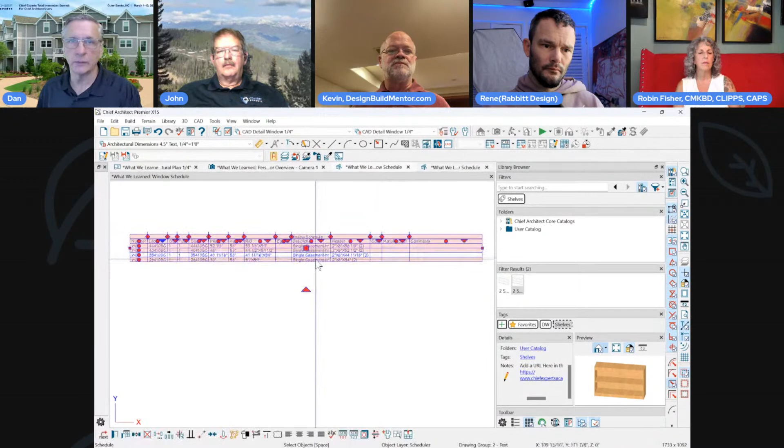That makes good sense. So as with all of your schedules, if you're putting schedules on a plan, they need to be right. Don't just put them there because they're pretty - make them so that people can use them. I think that goes without saying.

All right, anything you guys want to add? We're going to pick this same topic up again next week and see if we can get further down our list. Got anything to add? No, I sent you my list, which we covered a few of. No, we didn't get down to them. That's okay, Kevin's list - we talked about that because we showed some of the new features, Kevin, before you got in.

One tip to end here, since this came up in a training I just did - a lot of people don't know that just clicking your right mouse button while you're in the middle of an action with your left mouse button cancels the action. Escape does as well. If you're clicking and dragging or doing some action in Chief, clicking the right mouse button cancels it. So if you start drawing a wall and decide you don't want it, click the right mouse button and it will stop that action.

Is that the same as the space bar? No, that's for selecting objects by default, I think. This one is cancel. I'm not sure exactly what it's bound to, but if you're in continuous draw mode drawing a bunch of walls, you can always stop the last segment just by hitting the right mouse button. It might be bound to escape since it does the same thing.